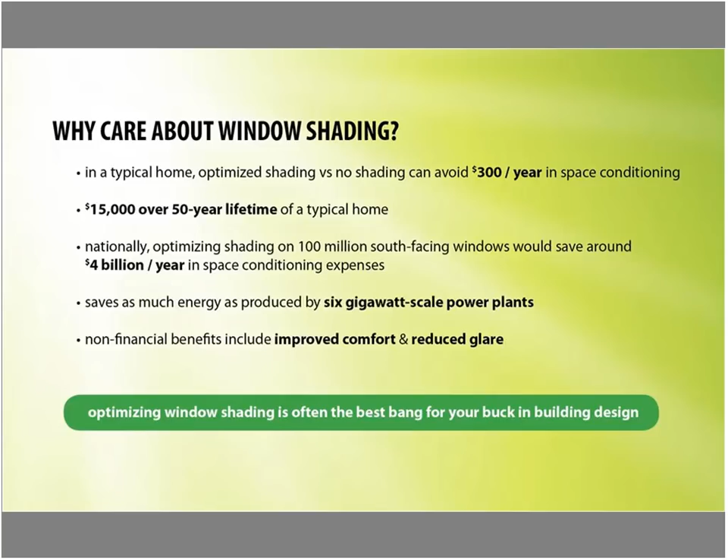So jumping right into it, overhangs have a pretty obvious advantage over certain other kinds of shading, and that's that they're a static building element that we just have to build once. They don't involve anything complicated with moving parts, movable shades, shutters, things like that. They tend to be something that occupants don't need to mess with, which is a pretty good thing because occupants are not always good at dealing with anything dynamic that they have to maintain or change daily or seasonally.

And another nice thing about overhangs is that they're pretty close to optimal for the seasonal changes of the sun's position. Now, the problem with overhangs is that they aren't quite optimized for that, and that's going to be a lot of what we're talking about today. Overhangs can get you pretty close to providing shade when you want it and sun exposure when you want it, but they're not perfect due to some challenges that are just plainly physical, and that's really what we're going to talk about next.

Another big challenge with overhangs is sometimes the optimal overhang is very difficult to manifest in construction. So you can come up with a theoretical design, this window needs this overhang at this height, but it's not always going to work with a specific building project. So overhangs in one sense are very simple. You can do some calculations. You can probably come up with what, from an energy perspective, is an ideal overhang. But in the real world, you're faced with all these challenges like your clients and the structural, aesthetic and financial aspects of the project.

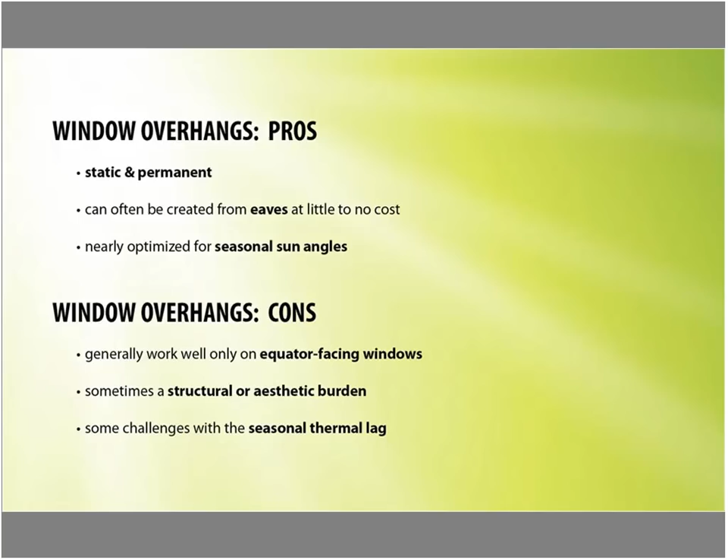The biggest challenge with overhangs is going to be the difference between where the sun is and what the temperature is, and that's the seasonal thermal lag. So I'm going to choose St. Louis just because it's in the middle of the country. I don't think I've been there in 30 years, but it has a moderate, balanced and representative climate for the United States. If we look at the daily temperatures, this is the average of the daily high and low in St. Louis.

We see that, as is typical in much of this country, it starts to get warm in early summer, it stays really warm through August, and starts to cool off a bit in September. So those are months where cooling is required to bring down the interior temperature to something that's comfortable for occupants.

We see in the wintertime, it starts getting cold in November, it stays cold through March, and April is kind of a shoulder month where some heating is required. So here we've just labeled as cooling any months where the average temperature is 75 degrees or more, and as heating, any months where the temperature is 50 degrees or less.

So if we take the summer solstice, right around June 21st, that's kind of the point where the sun is the highest in the sky during the day, and on both sides of that, it's going to be mirrored. So in June, the sun is in a certain place, but one month on either side of that, in May and July, the sun's in the same place. In April and August, the sun's in the same place.

So here we see, just graphically, in St. Louis, the sun at solar noon in June is at about a 75-degree altitude angle. Then way down in December, it's at about a 28-degree altitude angle. So it's a pretty big swing, and the point of an overhang is to take advantage of the fact that the sun is higher in the sky at the points where we generally want to have a little bit of cooling.

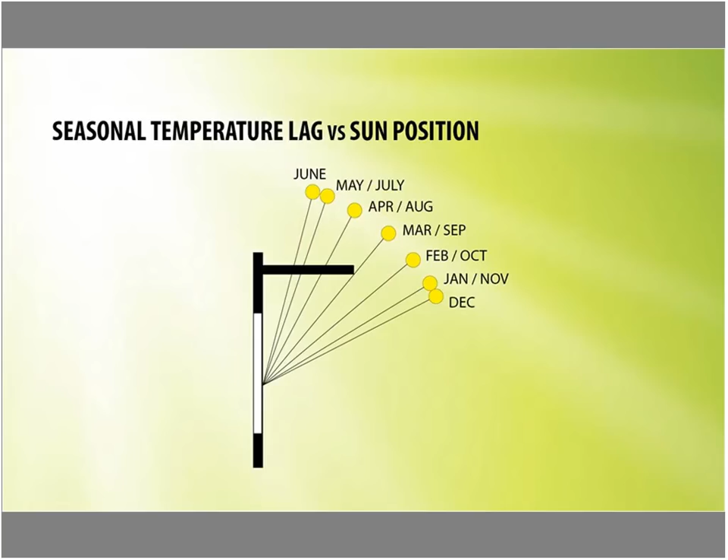So if we put an overhang on that window, this is just kind of a schematic representation, we see that during March and September, the sun follows the exact same path through the sky. And that is the big challenge with the seasonal thermal lag, because here we have the heating and cooling season of St. Louis mirrored around the summer solstice. The overhang is in the fixed place, and in March and September we see about a 25-degree difference in daily average temperature. But this overhang is providing the exact same amount of shade.

So while an overhang gets you pretty close to shade in the summer, sun exposure in the winter, the biggest challenge is about a month-and-a-half difference between the sun's highest point in the sky in a temperate climate and the warmest time of year. And that's just the physical property of the thermal capacitance of the land and the water, so that there is a 1 to 2 month lag of heating and cooling behind the position of the sun.

And that imperfection means that you're always going to have to make some balances and some compromises when designing a window overhang. And we'll see that right around the summer solstice, you're going to be fine because you're not going to need a lot of cooling, or if you are, the sun's going to be high in the sky. Right around the winter solstice, December, January, you're going to get good sun exposure. It's those shoulder months, March and September, February and October, April and August, where the sun's in the same place, but you want to heat in one part of the year and cool in the other part of the year.

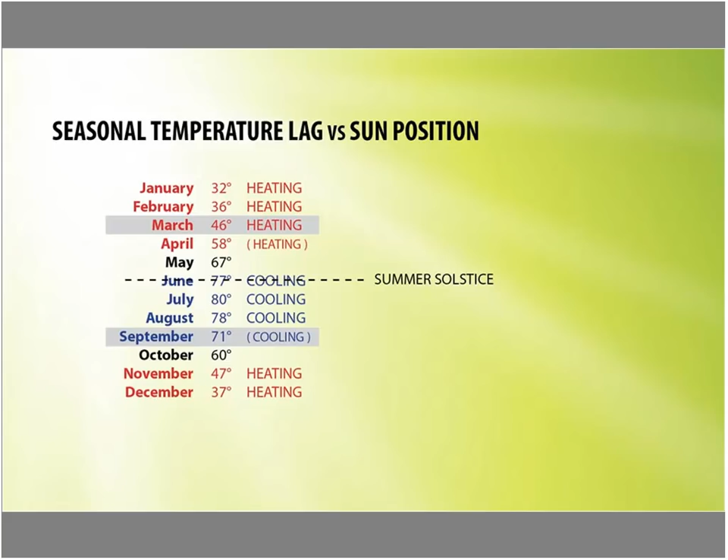So when we design an overhang, the first thing we need to do is figure out the whole context, because in general, we're going to want to have a little bit of a bias towards sun or a little bit of a bias towards shade. And that's going to depend on the climate you're in, how extreme it is, whether it's a heating or cooling climate. If you are in northern Minnesota, you're almost certainly going to want to have a bias toward getting as much sunlight as possible, as much heat. If you're in the Southwest or the Deep South, you're going to want to bias toward as much shade as possible.

So as an architect or designer, figuring out what's your climate, what are my building needs, what do I have for heating and cooling? If you don't have an air conditioner, you're going to want a little bit more of a bias toward making sure you don't put too much heat load on the building, even at the expense of not quite as much heat in the winter as you'd like.

The glazing configuration is pretty important, making sure you have as many windows facing the right directions. Most people are going to say you want at least half your windows facing south. Again, that really depends on the kind of building you have and the climate you're in. And here we're mostly talking about residential, small commercial buildings. Everything is pretty darn different once you get into large commercial building design like skyscrapers.

So but those don't tend to have overhangs. So we're just going to kind of focus on small residential buildings where we're looking at 10 or 20 or 30 windows, which we're trying to balance here. And finally, occupancy. What are the spaces used for? And ideally, the window overhang design is addressed early in the process, and the building and the occupancy needs, those are all part of the design process holistically from the very beginning.

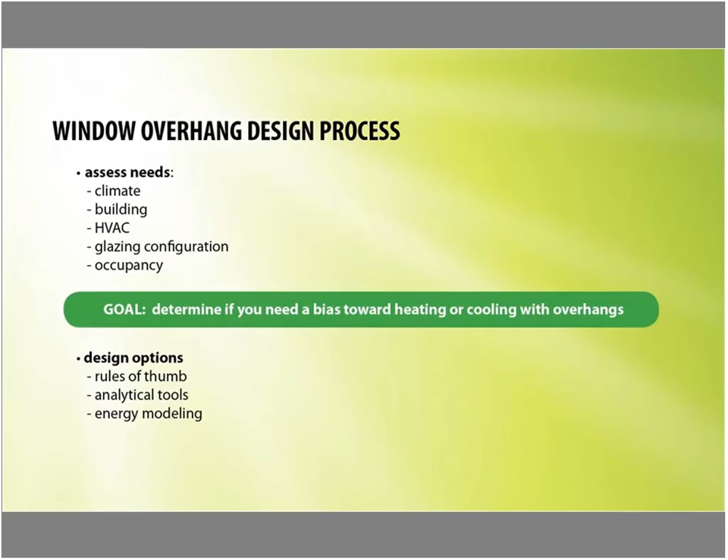I have a number of tools on my website that involve windows. Some of them are more for sun position, some of them are more for climate, but this is a list of some of the tools I have for doing overhang design. And if we wanted to see the impact of an overhang on one window, and see what it looks like at a given date and time, there's the window overhang design tool.

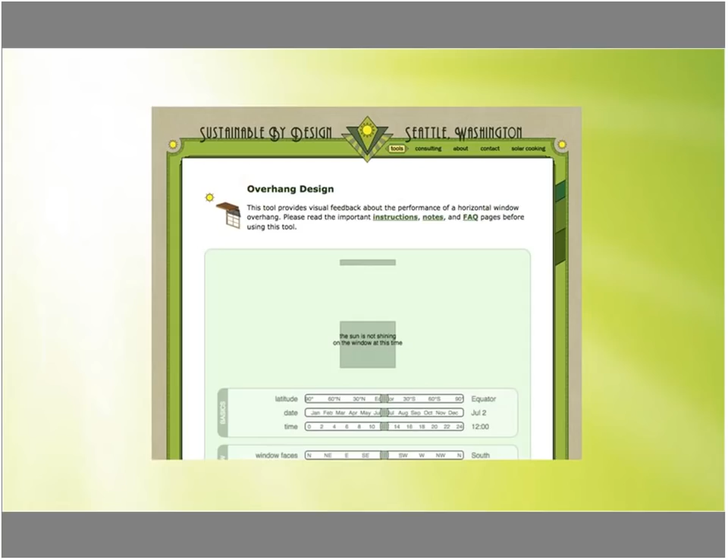And this is pretty simple. This is a graphic of a window and a graphic of an overhang above it and a bunch of sliders. And you can set the sliders to where you are, when you are, and where your window is facing and how big it is. So taking St. Louis, if we want to take a hot time of year, this is mid-August afternoon.

We have a window facing south, and we're just going to say, what happens if we put an overhang about 18 inches above the window that extends about 3 feet out from the window facade? What's that look like? So if we just take the sliders and set the latitude, date, and time, set where the window faces, put its size, and set the dimensions of the overhang, you'll see that there's your window, there's your overhang, and it's about 60 or 70% covered in shade.

Now you can just move the sliders back and forth, and it's like a what-if scenario. What if my overhang were wider, because I'm going to shade the windows with the eaves of the house? What if the window were a little bit less under the overhang? Just move the overhang closer to the window, we're going to improve our shading. What if the overhang is only as wide as the window? What's that look like? So a tool like this is pretty good for doing a quick visual representation of the instantaneous shade on the window from a specific overhang.

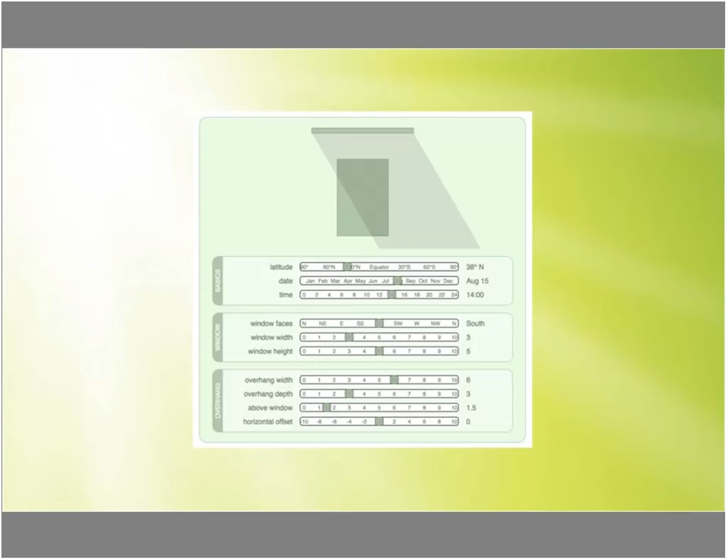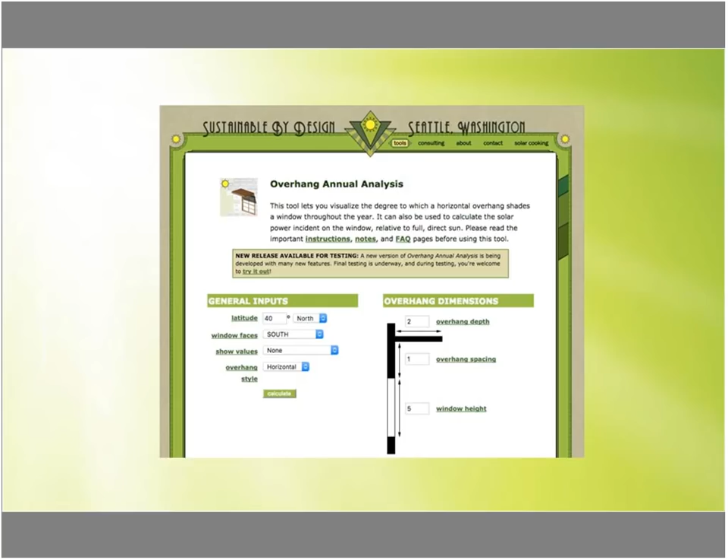And this is cool unless you're trying to look at a whole bunch of windows for the entire year, in which case you need a tool that helps you visualize what it looks like on a larger time scale. So the second tool that I have on my website looks at an annual analysis of a window overhang. The Overhang Annual Analysis tool also takes as inputs your latitude, the direction the window faces, and it takes the window overhang dimensions into account.

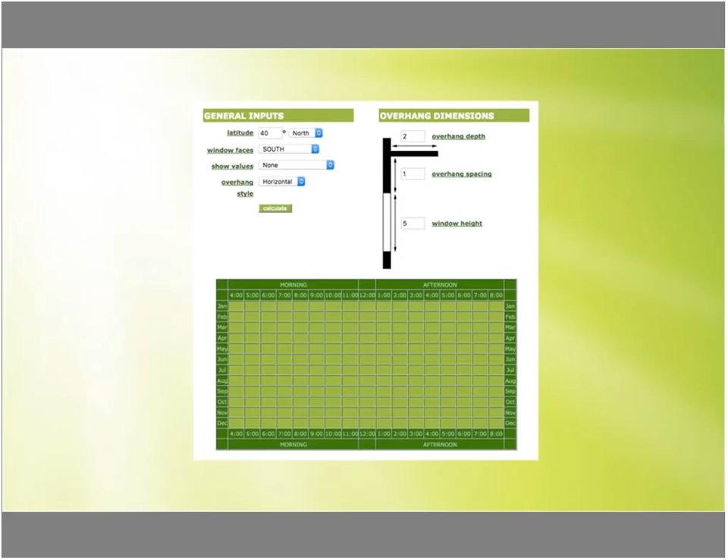And then it has a little matrix below it that has the entire year represented. So the rows of that matrix are the months of the year. The times go across left to right from morning through afternoon. So if we were to take the data for St. Louis and the overhang we were talking about and enter it here, so there's St. Louis's latitude with a south-facing window. We have a 3-foot by 5-foot window with a 3-foot overhang 18 inches above the window.

Hit calculate, and this shows you throughout the entire year what the shading is on that window. The light green squares are when the sun is below the horizon. The blue squares are for when the sun is above the horizon, but it's behind the window, not shining on that facade. And obviously, all of the data there shows you the percent shading throughout the year.

So if we take the current month, I think we are in February by now, we see that between 7 a.m. at sunrise and 5 p.m. in the afternoon at sunset in St. Louis, we get just a little bit of shade, primarily concentrated right around noon, where we peak with about 20% of the window getting some shade. As expected, this is mirrored around the summer solstice and winter solstice, and we get a whole lot more shade in the summertime than we do in the wintertime.

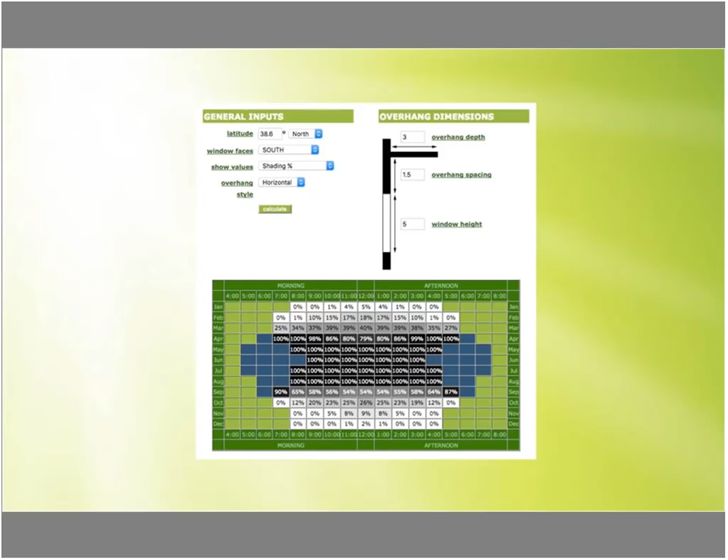What if we want a lot less shade on that window for some reason? Now the overhang is shorter, it's moved above the window a little bit, and we still get some summer shade, but you're going to see some problems in that window in the late summer. So now we're looking at August, the window's only about half shaded at noon.

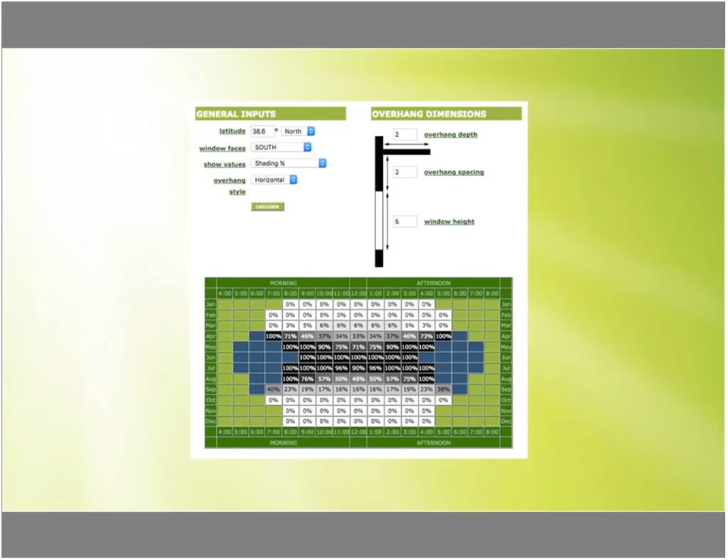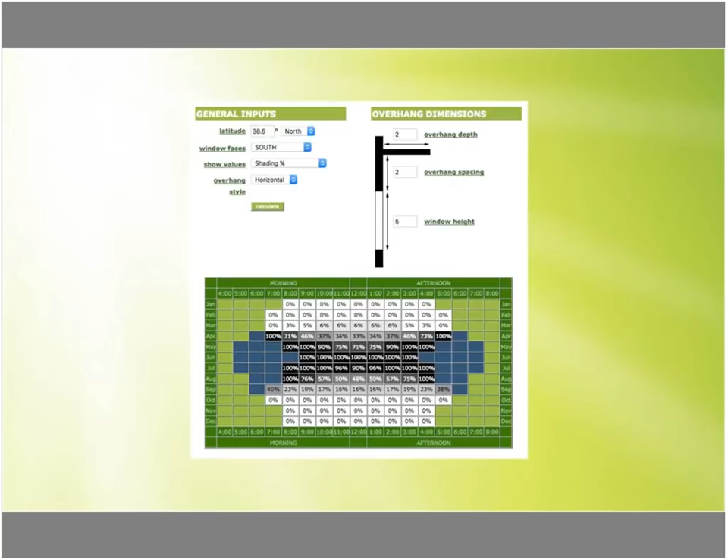On the plus side, we have very, very good sun exposure in the wintertime. So if for some reason that were your priority, an overhang that's both shorter and further above the window probably gets you closer to what you'd like. So doing a more specific example, let's say that we have a house in St. Louis and we're trying to design it without an auxiliary cooling system. So our bias is for more shade.

This is actually pretty common, not just not having an air conditioner, but needing more shade. People like windows, and very few homes get to the point where, wow, you need more heat gain. The vast majority of homes that are designed are going to benefit from a little bit more shade, a bias toward shade with the overhang. And that's not just because of their climate, it's often because it's a little bit more comfortable to be in a house that's not overheated.

If it's a little cool, it's easy to add heat, it's easy to put on clothes, it's a little harder to take off clothes and to remove heat. So the majority of homes where you start to pay attention to shading are going to want a little bit more of a bias toward shading. So we're going to take an example of St. Louis, and let's remind ourselves of the climate here.

We have 3 months where cooling is a high priority, and if we're really trying to provide shading, even getting into September, we're going to want to create some. September has plenty of 85-degree days in St. Louis, especially early in the month. And at that point, if you're getting 2/3 of your windows with sun exposure and it's 85 degrees, you're kind of living in a greenhouse.

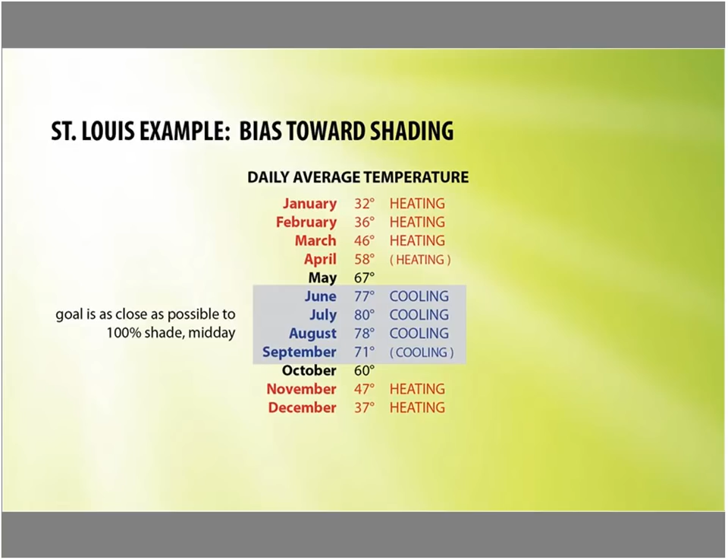So let's see if we can design an overhang that's going to really focus on providing definite shade in the first part of the summer, June, July, August, and kind of as much shade as possible in September. So if we first look at the rule of thumb we were talking about earlier, this is a schematic representation. You'll see this in the LEED documentation, almost this exact diagram. You'll see this in a lot of passive solar design books.

We've taken a window, we've drawn a line from the bottom of the window at the summer solstice noon sun angle. Again, that's 75 degrees for St. Louis. And we've taken a line from the top of the window, we've drawn that at the winter sun angle, which is about 28 degrees for St. Louis. We connect those two lines, and that's where we locate the lower outer edge of the overhang. And this is probably the most common method that's used out there.

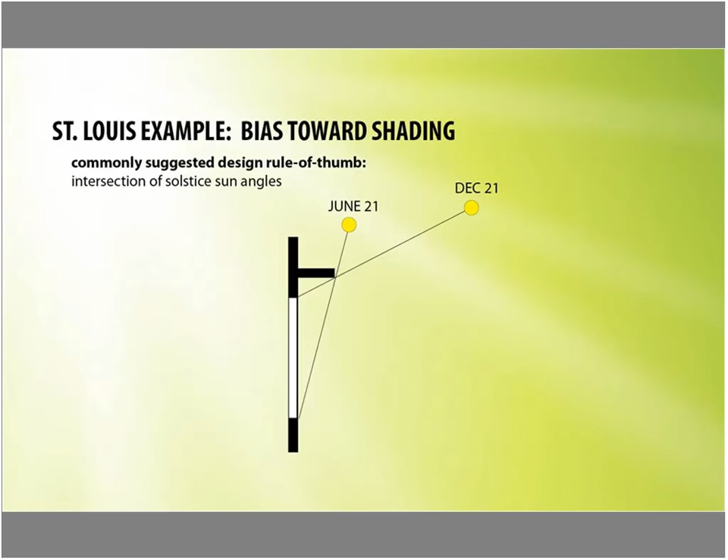And if we use this design for St. Louis, we find doing a bunch of trigonometry, so this rule of thumb is actually not that much easier to use than an analytical tool. If you do some of that trigonometry, you'll find that your overhang ends up about 18 inches deep, about 10 inches above the window. So if you enter those dimensions in feet in the overhang dimensions in the upper right of this diagram and hit calculate, you'll see that the shading is represented below.

You do get pretty good shading in June. You start to see some sun in July hitting the window. August, the window around noon is about half shaded. In September, it's about 1/4 shaded. So using this rule of thumb, it sure is better than no overhang at all, but you can see here pretty obviously that when it's 90 degrees in August and you have several hundred square feet of windows and they're only half shaded, you're going to have a pretty significant overheating challenge in that home.

Hey, Chris, I just wanted to help clarify for a comment that came in. Yes. When you say a bias towards more shading, you are specifically talking about shading that is hitting and coming into the house and not shading that's hitting the roof line. And the reason I say that is somebody was concerned because they were saying, well, we want as much sun as we can if we're putting active solar on our house.

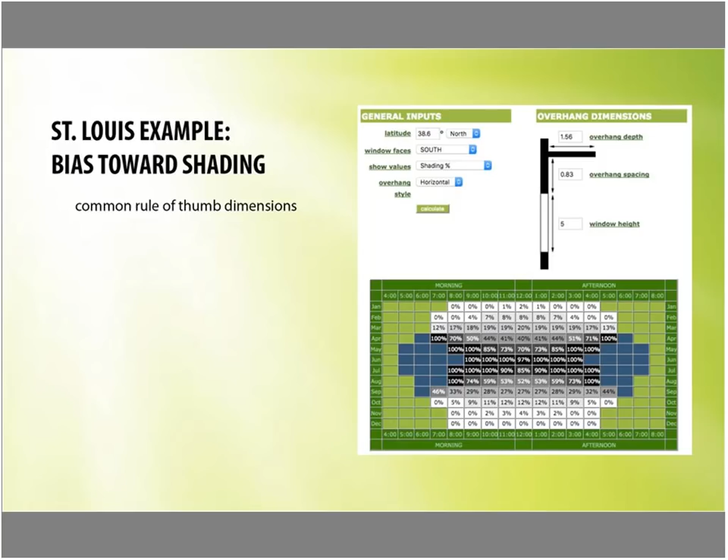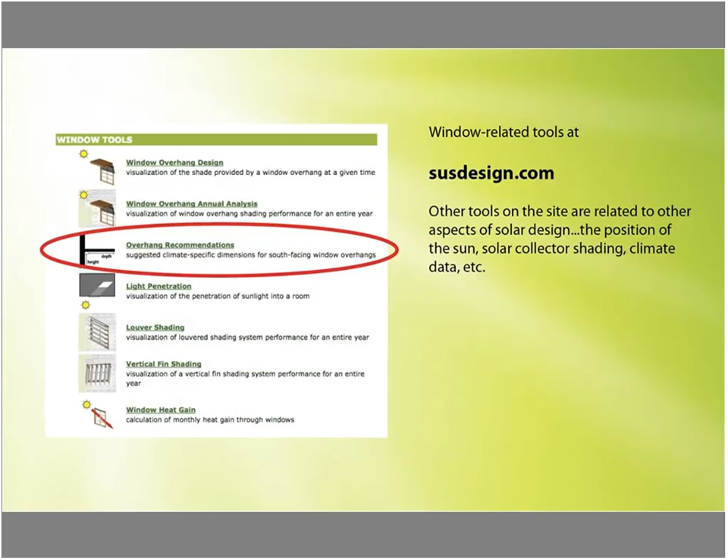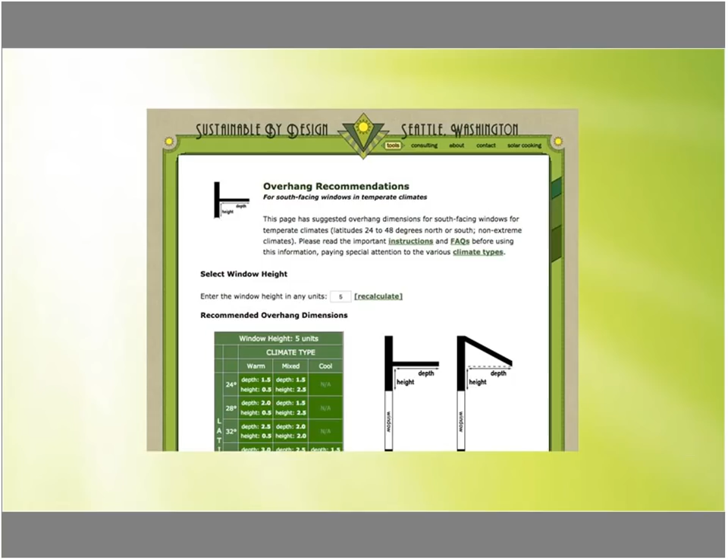So, if we take the exact same scenario and we want to come up with an overhang that's not just the rule of thumb, or maybe this is just another version of the rule of thumb, I have a super quick overhang recommendation tool that helps you at least get a place to start with window overhangs. It's pretty simple. There's one input, and that is how high is your window? What's the height of the glazed area of your window? And you enter that, and it will tell you at different latitudes for different climate types, what's the ratio of the overhang to the window that's probably a pretty good place to start to meet your needs.

This is just, again, very, very simple, but if I have a 5-foot tall window, St. Louis is a mixed climate for sure because you have heating and cooling. The closest latitude in this chart is 40 degrees to St. Louis, which is at about 39. So if I cross-reference 40 degrees latitude with a middle column of mixed, with a 5-foot window, I see a pretty good place to start is an overhang that's 3 feet deep, that's 1.5 feet above the window. So already that's an overhang that's twice as high and twice as deep as the previous rule of thumb.

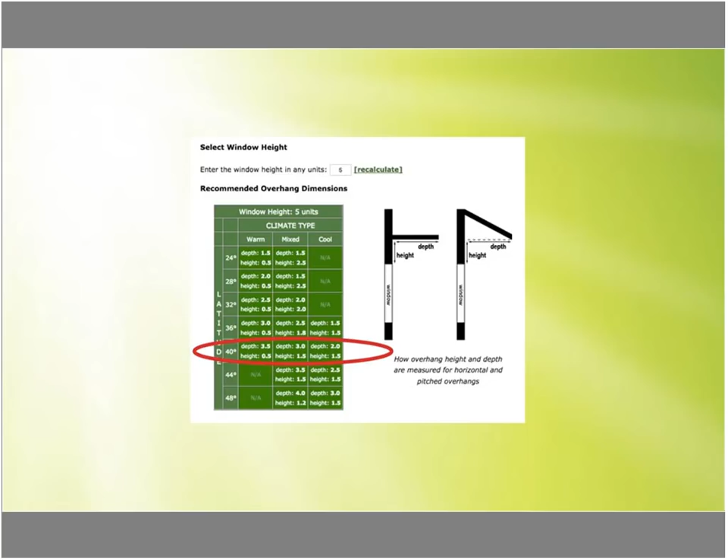So if I take that overhang and I enter it into the overhang annual analysis tool and hit calculate, you'll see that we get a little bit more shade than the example before. That's just a bigger overhang. And we can see that in June, July, and August, we now have 100% shading, and in September, we have about 50% shading. So looking at our priorities for this example project of getting more shade, we see that in August, we've really changed the shading from half to full. In September, we're seeing a lot more shading. This is just a place to start this recommendation.

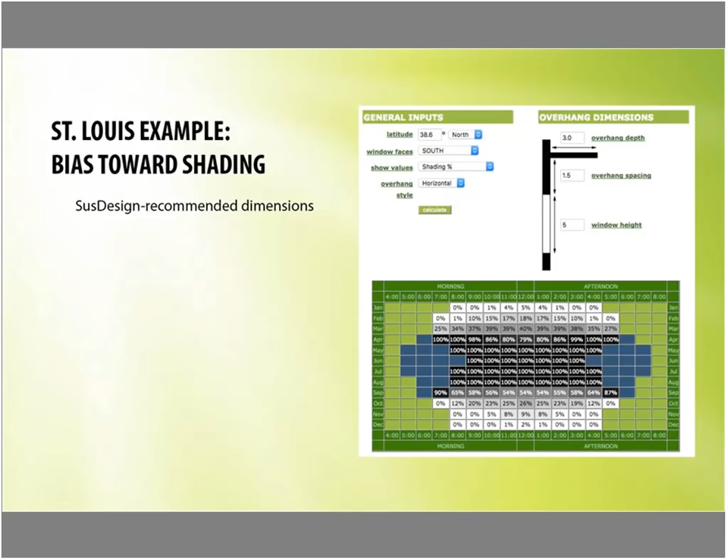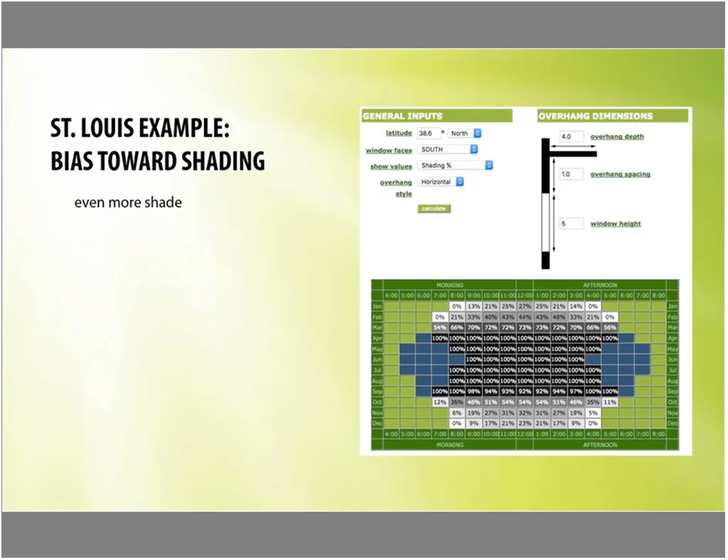If we do a side-by-side comparison, here's the shading output for the St. Louis example with the rule of thumb that's used by LEED and others on the top, and using the simple overhang recommendation of 3 feet and 1.5 feet down below. And it's not like it's incredibly different, but if you do look at July, August, September, especially August, this would be a very substantial difference in the house, having the windows half shaded or completely shaded in August, just from a comfort perspective, and if you had an air conditioner, from an energy and economic perspective.

Chris, there's a question. Is there special consideration included for a greenhouse window which extends 1 foot from the vertical surface of the wall? So is this a window that sticks out that's connected to the house, or that's thermally decoupled from the house? I guess we'll let them answer and we'll keep moving. Okay, yeah, just let me know.

Yeah, I mean, obviously, this is a very simplified example, which is just a vertical window on a vertical facade. As soon as you start getting into more complex situations of windows facing other directions, of different types of windows that aren't vertical, skylights, you know, a greenhouse that's disconnected from the house a little bit, those start getting into a little bit different considerations.

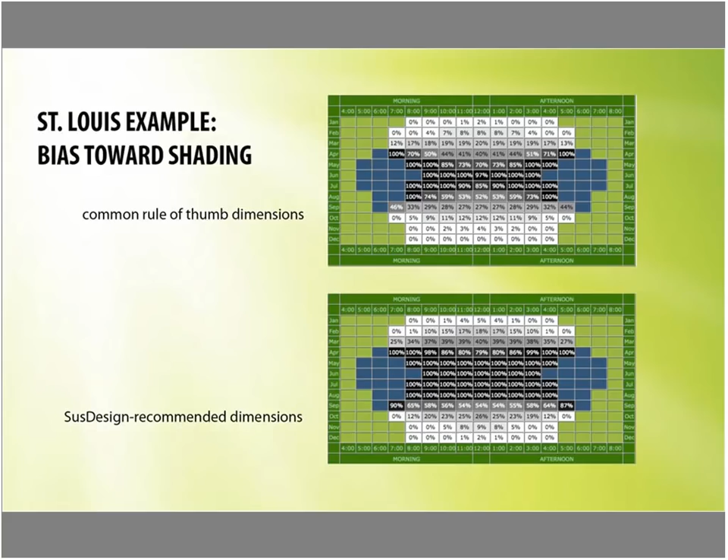But fortunately, the vast majority of windows are pretty simple rectangular things on vertical walls, so usually you can use tools like this. If we look at these two examples of taking 8 windows, 3 foot by 5 foot, using a rule of thumb to do the design and just doing a little bit of a tweak to the design using these recommendations, visually this is what it looks like.

If we look at it energy-wise, there's a difference on an annual basis of about 100 kilowatt hours of excess solar gain per square meter of window area. I think we're going to have time to chat about that toward the end of this call, but there are some tools available to calculate that as well. All I did is look up those 2 overhang scenarios and look at how much heat gets into the windows. And again, it's 100 kilowatt hours per meter squared of glazed area, or about 1,200 kilowatt hours a year of excess heat getting in due to the difference between those 2 overhangs, the rule of thumb and one that's a little bit deeper and above the window.

So if you don't have an air conditioner, you can just think of that as 1,200 kilowatt hours of heat that makes your life a little less comfortable. If you do have an air conditioner, you're probably going to save yourself $30 to $50 in air conditioning bills by not having that excess heat. Compared to no overhang, it's a pretty big difference. It's a couple $100 a year or more, but just the difference between these 2 dimensions of overhang is about $40 a year in air conditioning difference. Not huge, but over the lifetime of the house, it's a couple $1,000s.

And when you're doing passive solar design, when you're doing green buildings, there's a lot of little decisions to make. Every window, overhang, wall component, all the parts of the building. A successful passive solar building, a successful green building is simply a series of a lot of very good decisions being made at an integrated level. And so this is just south window overhangs, one orientation, one element of one part of the design, and it's $2,000 in savings. The idea is that if you could get all the elements of a building right, these add up to tens and tens of thousands of dollars of savings, so pretty significant.

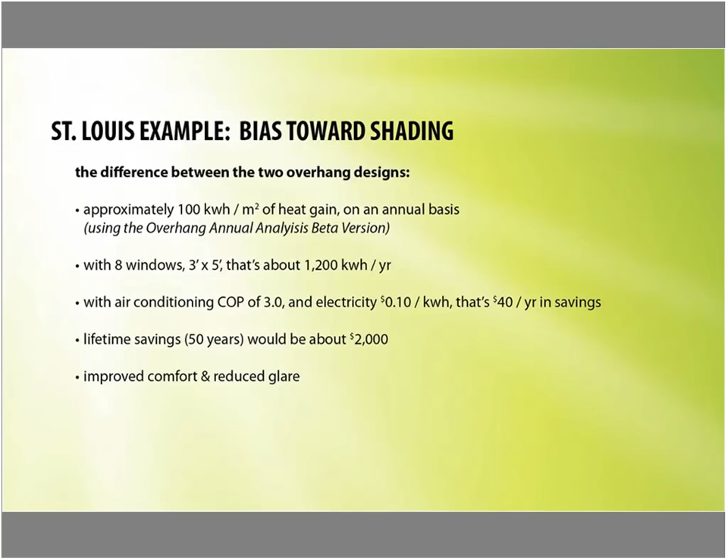So the overhang annual analysis tool looks at direct sunlight that's coming into a window and how much that window is going to be shaded. I have a very related tool that's simply a version of it that is still a little bit under development, but it has two changes from the original overhang design. Its purpose is still to help you optimize an overhang. You still input information about your climate, your window, the overhang dimensions, but it has output that differs in a couple of little ways if it's useful to people.

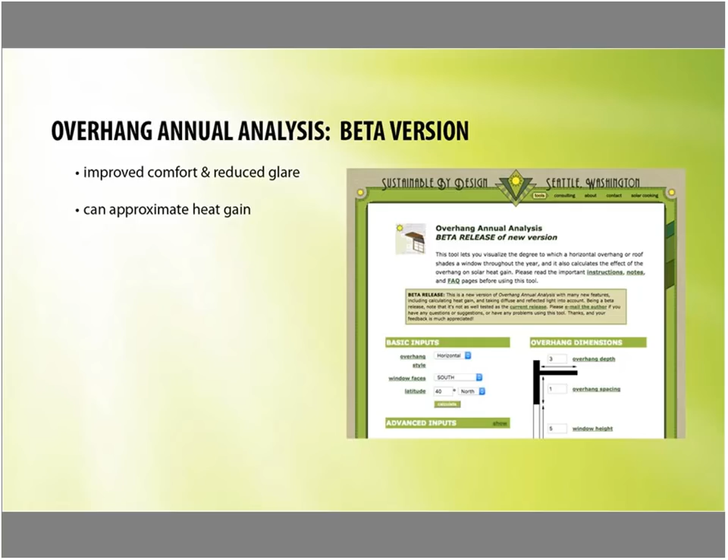So the first, when we were calculating this before, we were just looking at direct sun. This is the beta version of the tool, the new one, and we can leave this set to direct sunlight only with the same overhang dimensions as before, and the outputs look identical to what we had earlier.

So we get shade throughout the summer. We're about half shaded in September, and this is just looking at what's the impact, assuming all of the radiation from the sun is coming directly from the sun. The point of this tool is to improve the accuracy of that calculation. So we can more accurately, if we're trying to get a little more precise, look at the sun that's coming in through a window through three different means.

The direct sun, which is just the direct radiation coming from the sun; the diffuse radiation, so what's coming from the sky, so the sky is going to both reflect, reabsorb, and retransmit radiation, so that is a non-trivial part of solar radiation, and it doesn't just come from the sun; and then reflected off the ground. So if you take this tool and change it from direct sun to direct and diffuse and reflected, you can see how much the outputs change.

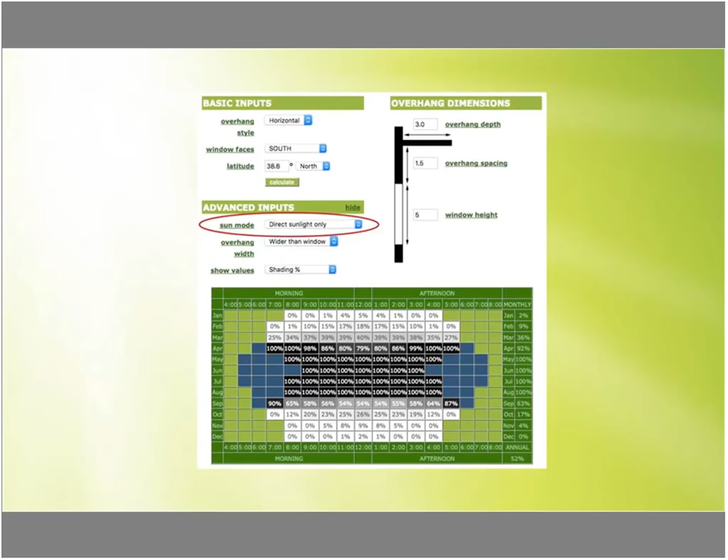So here's what it looks like with direct sun. Here in the summer, you're getting 100% shading. In the winter, you get 100% exposure. But more accurately is to look at what's the total solar radiation coming into that window from all sources. And this simply breaks up the solar radiation into those three components and analyzes them independently.

And we'll see that in the summer, sure, you are getting some shade, but you're not getting 100% shade. You're getting 62% shade or 56% shade, and that's simply because the overhang does a wonderful job at preventing all direct sunlight from getting in, but almost half of the solar radiation gain in the summertime is not from the sun direct light, it's from the sky, which the overhang provides only partial shade from.

One reason it's a big difference in the summertime is that when the sun is really high in the sky, two things happen. First of all, the window has a small cross-section compared to the sun. So imagine the sun's 75 degrees up in the sky, the window kind of looks effectively skinnier to the sun than if the sun were lower in the sky. So a smaller percentage of the incoming radiation is from the sun at high sun angles, whereas the sky looks the same to the window all the time.

The other factor is that when the sun is high in the sky, it's at a very oblique angle to the glass, and as soon as the sun gets to about a 70 degree angle, the glass starts getting very reflective, and by the time the sun's at 80 degrees, glass is almost like a mirror. So it's just a little bit more accurate to look at the total physical picture of the different types of solar radiation, and it does make overhangs look a little bit less effective, but just accurately, that's what they are.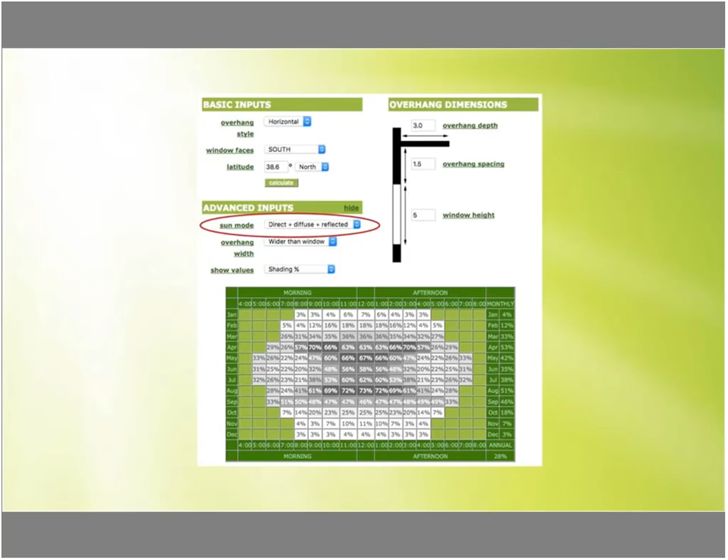And so the purpose of this tool is to provide a little bit more scientifically accurate data and bring that into the conversation. The other thing this tool will do is it will let you look at the heat gain coming through the window, not just the shading. So here we're looking at the amount of window that's shaded. Here, the tool is calculating in kilowatt hours per meter squared of glazing how much energy is getting through that window. And in the end, this is the most accurate thing to do when you're looking at what is the energy and economic impact of a window overhang.

And this was really the impetus for me to design this more accurate version of the tool. It's accurate by taking the different components of solar radiation into account, and it's accurate by not just thinking about the light, but the actual thermal load that that solar gain is putting on the house. And as we can see here, it's pretty good. So in the summer, we're just looking at a few kilowatt hours per month at that hour that's getting through the window, whereas in the wintertime, you're looking at values that are 7 or 8 times higher.

So this overhang, you can see, makes a pretty big impact in the house, getting you almost an order of magnitude more solar gain in the wintertime when you want it than the summertime when you don't. So ignoring the seasonal energy lag, this is a pretty effective thing. The seasonal energy lag means as a designer, as an architect, as a home builder, you're the one responsible for taking that into account and balancing that overhang with all of the other components.

Were there any questions about the beta version of it?

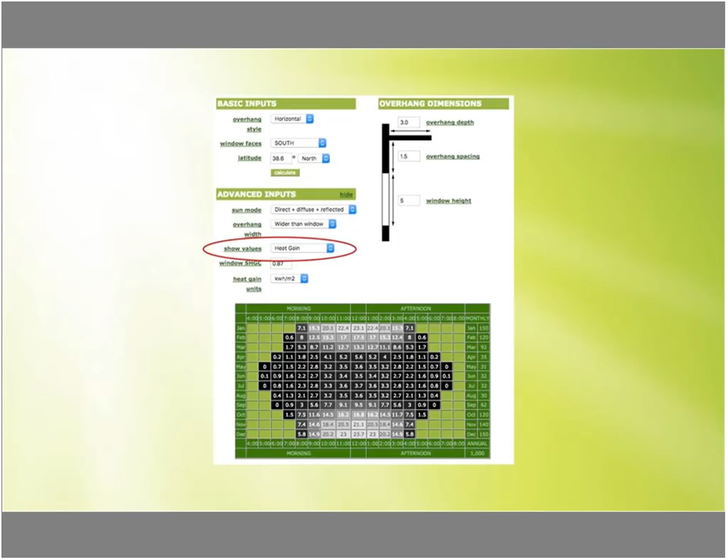Building orientation for passive solar. This is a LEED v4 prescriptive pathway credit. So if you're not taking the performance pathway, you can be sure to pick up your solar orientation credits within this section here. Some of the things to look at is ensuring that you meet some of these goals here. All of the different tools that Chris presented that are available and open source, I believe, can help you hit some of these bare minimum thresholds. These are sort of the bare minimum that you need to achieve for LEED for Homes purposes. Using some of these other tools that we discussed is going to get you much more in depth and in detail, but they'll at least give you the data you need to do a preliminary plan review and ensure it's on track for LEED.

So obviously, the first step is analyzing the site. If you have the choice to choose the site that you want, that can make or break solar impact as well, especially if the site is completely shaded out or completely open. And then there could be requirements in certain lots or certain neighborhoods that a house be facing a certain way, and that can impact you or require you to go and get some kind of waiver. But knowing what your site is going to be is your number one issue, and knowing the climate, of course.

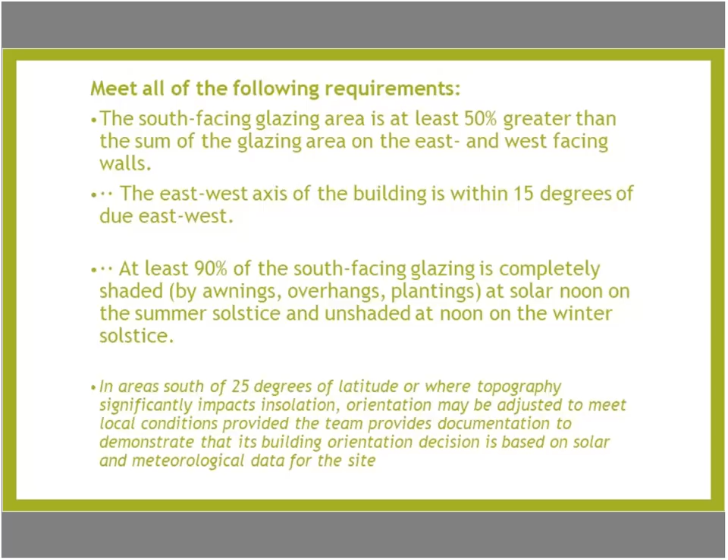And then there are other passive solar strategies, so considering incorporating thermal mass, heat absorbing flooring, thermal storage walls, masonry features for winter solar radiation, and all those different items are things that you can take a look at. So project teams whose buildings have views to the east, west, or north should consider design revisions to assist in meeting the criteria for the credit.

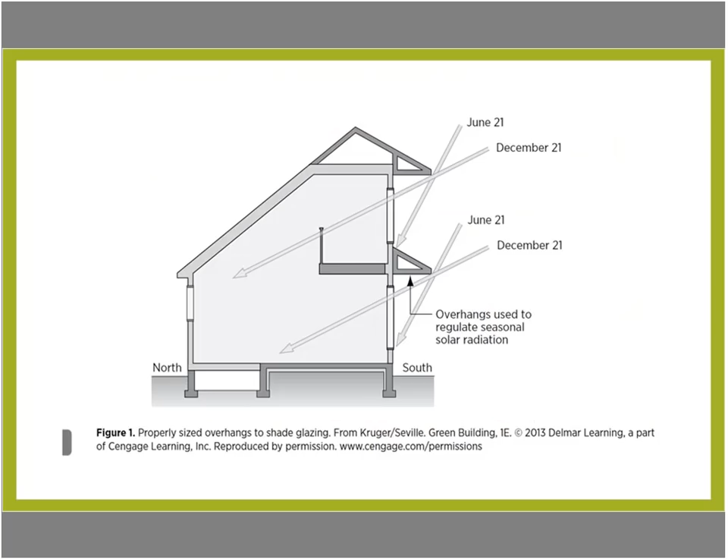For example, the addition of a deep porch and well-placed landscape would shield west-facing windows from excessive heat gain and preserve the view. On a north facade, triple-pane windows would allow the large expanse of glass for scenic vistas without compromising energy performance, and an experienced architect can help projects meet the criteria for the credit while saving energy and improving that thermal comfort side. So that's the prescriptive pathway.

Now, the performance pathway, which is what most project teams use, so that's LEED BD+C v4, EA annual energy use. Under the new LEED v4.1 rating system for homes, the prescriptive pathway will go away entirely, so only performance. In this case, you're going to be working with REM/Rate and the HERS index rating. Architects can get access to REM/Design or REM/Rate Lite and produce their own preliminary ratings without bringing a rater on board, and so that gives designers the ability to work with some of these different details that exist within REM/Rate.

There is a handout here that everybody should have access to, and that we'll send out a little bit later. That's from REM/Rate, but it tells you all of the different options. So when you are designing your house, you can put in your window-to-wall ratios, solar heat gain coefficients, window area, orientation, overhangs and shadings, interior shading such as blinds, and adjacent shading details. And you can start tweaking those things and start seeing what your energy load demand is, and then obviously design from there.

So if you get this right, then maybe you need a little less insulation. Maybe you need a smaller heating and cooling system. Maybe you need less PV. And so that can all be done in the rest of REM/Rate, and then that's going to get your HERS index rating, which is going to give you your ultimate LEED score there. So that's all we have here.